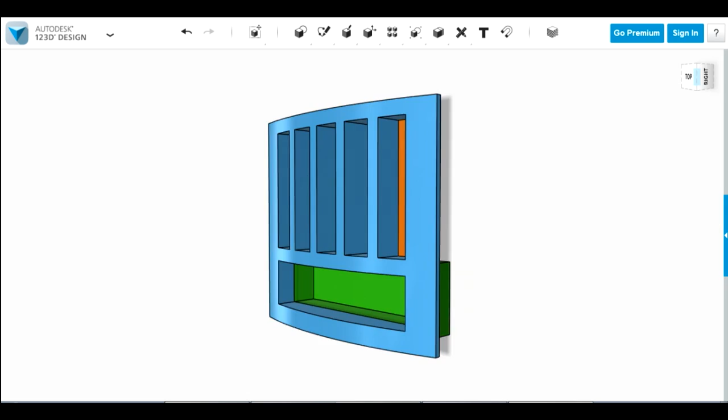They've got kind of a bottom vent which is much deeper, and some short ones, and typically on an R2-D2 they are chrome or silver, and the orange piece would be blue, and this green piece I'm doing as a separate piece so it can be stuck on afterwards, but basically that would be the same colour as the main body. So in fact this piece is printed flat on the ground, the orange piece is printed flat on the ground, and so is the green piece, and then those are all stuck together to make the vent.

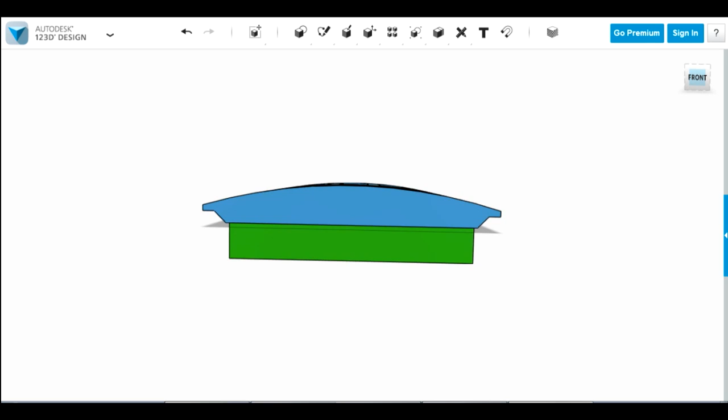Now I've made mine slightly wider than they should be, because obviously I've got no skins on my droid, but I still want it to cover up the part of the frame where that fits. And we can see there's sort of an overhang there on the blue part which will actually cover up the two frame verticals, and it shouldn't go that wide, and all of the slots should be thinner. But there we go, so it's slightly disproportionate, but it does fit perfectly into the droid.

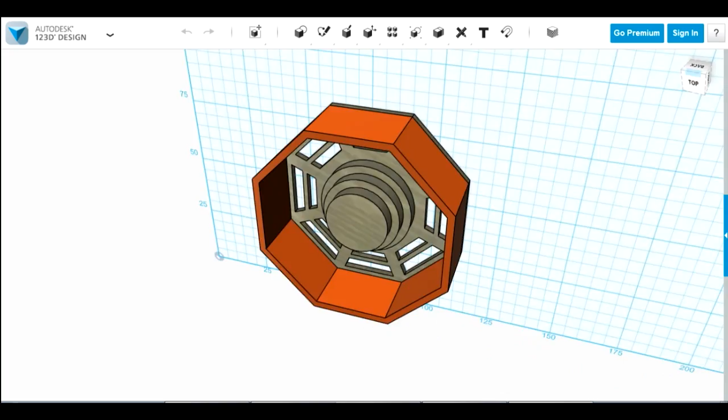The next part is the octagon ports, of which again there are two, and I've seen various varieties of these. Some people have a kind of blue interior on their R2s and the rest is silver. So sometimes they're all completely silver, but I've decided to do mine in two tone so that I can make my droid look a bit more interesting. And again, these are printed in two parts, one in orange and one in the silver ABS. So let's get those printed out and we'll see how well they fit.

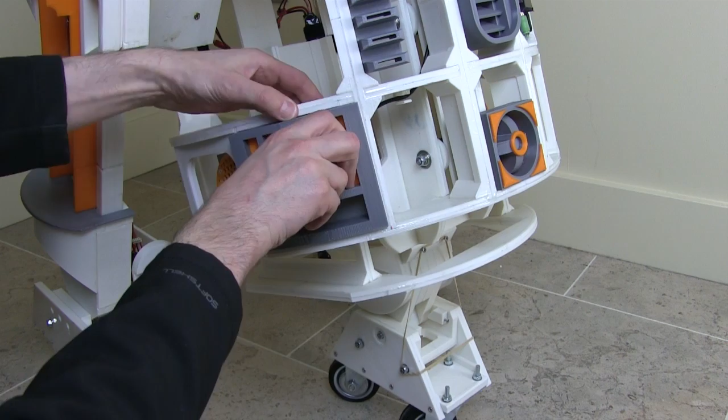So the pocket vent fits in here. Ah yes, that's a good fit. And the octagon port goes in there. So we're just going to solvent weld that in with a bit of acetone, and then the other two go around the back.

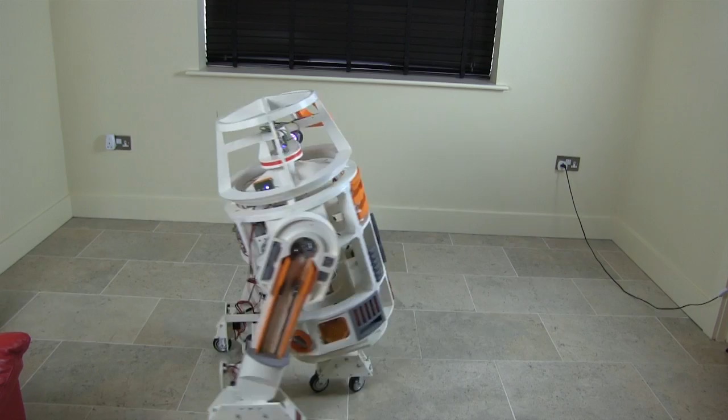Right, that's enough music. Let's talk about the animatronics. So to control the servos, which are these ones, I've already bought a bunch of Hobby King single chip digital servos, and I've already used those for the utility arms and the holo projector in the head, and I'll be using those for the rest of the features, mainly because they're white.

So the boards I'm going to be using to drive these, instead of driving these straight off the Arduino, which would need quite a lot of PWM pins, I'm going to use these Adafruit 16-channel PWM driver boards, which are I2C boards, and you can daisy chain as many as you like on the I2C bus, up to about 62. And you'll notice they have these little solder link things, which is basically 6-bit binary, so you can have a binary number there, bridged with solder, counting up, and you can put 62 of these in a row, all on the same two I2C pins, and run 16 servos from each one.

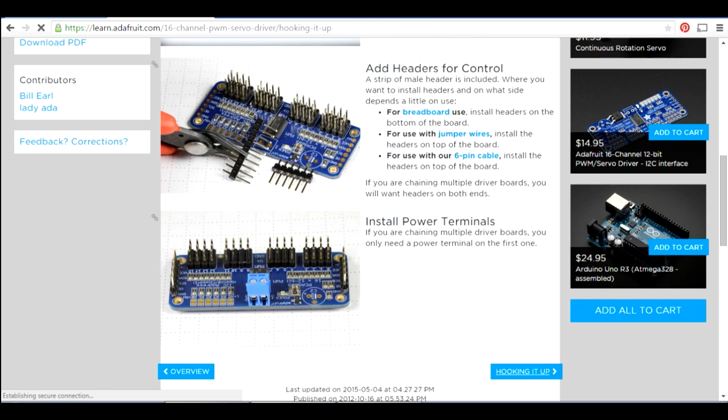There's a terminal block on the front there which is power for the actual servos, which you shouldn't take off the 5V Arduino because the servos can draw quite a lot of current depending on what you're doing. So there's a hookup diagram here for various Arduinos. It is just power and two I2C pins.

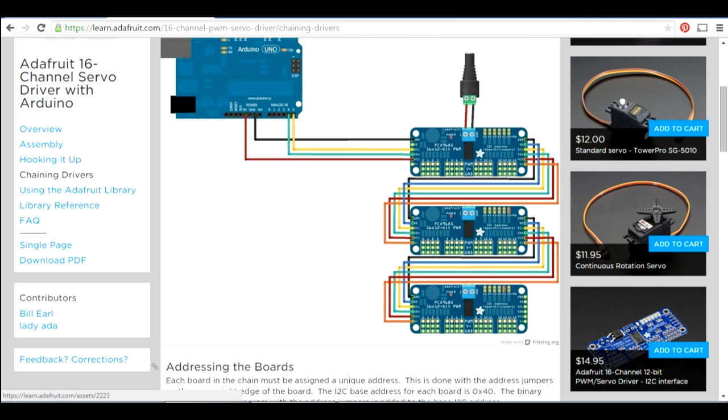But those vary depending on your Arduino board, and of course you can chain these together, up to 62 together, and you can go in and out on the pins at each end, or you don't have to, you can just go and cable I2C to each one.

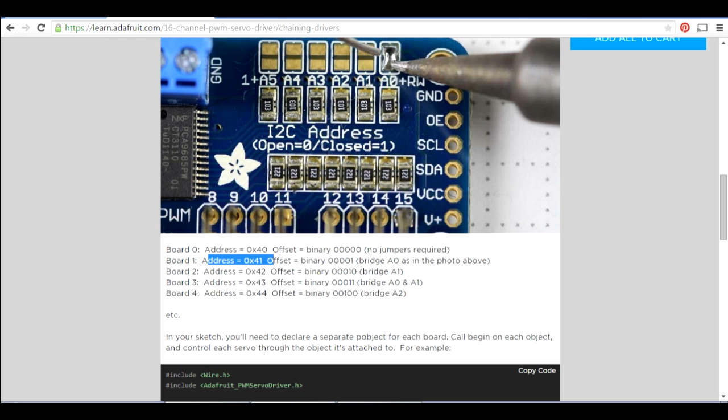Again, there it mentions how to address the boards, which I already mentioned, and that basically gives you a different base address, so you specify that in code to say which board it is, and then you just set up a new PWM instance and then you can address those individually.

There is a library and some example code which drives a bunch of servos, which is fairly easy to use as with most Adafruit products, and basically it tells you here helpfully how to use the map command to convert the pulse length into degrees so you can get that servo to go to a precise position.

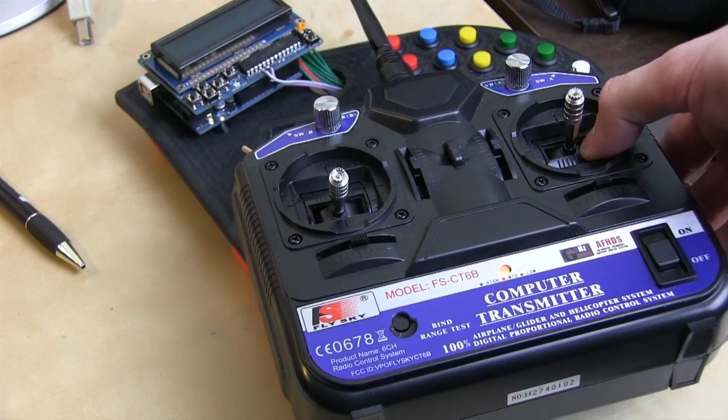So if you remember, my remote has got quite a lot of functionality. It's got this menu system for actions and sounds, which do various things on the menu, and also a bunch of buttons I can press, as well as the normal controls for driving and spinning the head.

So the normal way to code stuff in Arduino, or at least to say have the NeoPixels flashing in the logics, have various other things happening, is to have some stuff happening. Then typically people do a delay of some amount of time, and then have some other stuff happening, and then have another delay with some other amount of time, and some other stuff happening, and then maybe some if statements. If a switch is pressed, do one thing, else do something else, and then we'd have a loop that takes us back to the beginning.

The only challenge with this approach, when we've got so many things going on, so we've got all of the animatronics, we've got the sounds we need to play, we've got the logics flashing, which are NeoPixels, which are constantly counting up in a loop. The only issue we've got here is that these delays will actually completely stop processing, so the loop stops during that time. So that's not particularly great when we're trying to multitask so many things. So what we need to do is create something called a state machine.

So using delays would mean if I wanted to open one of the utility arms and then close it a short time later, all the time it's delaying counting, I can't do anything else like play a sound or open another utility arm. So instead we're going to use a completely different approach using timers.

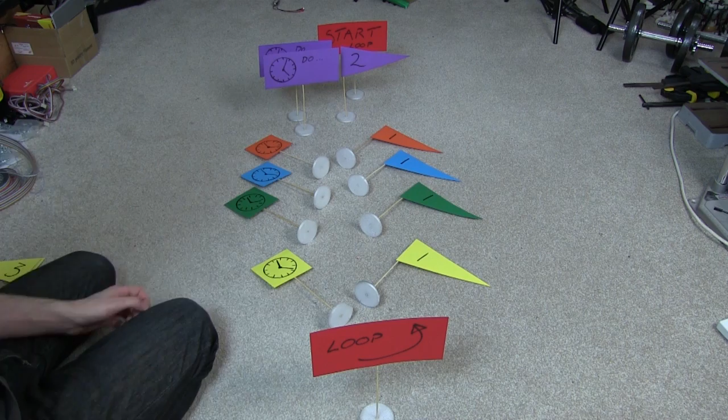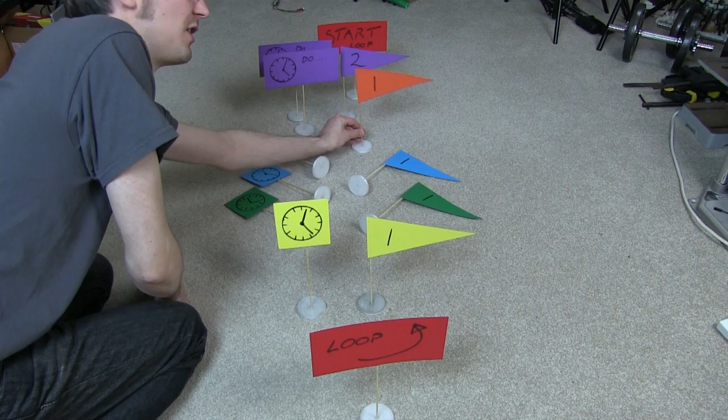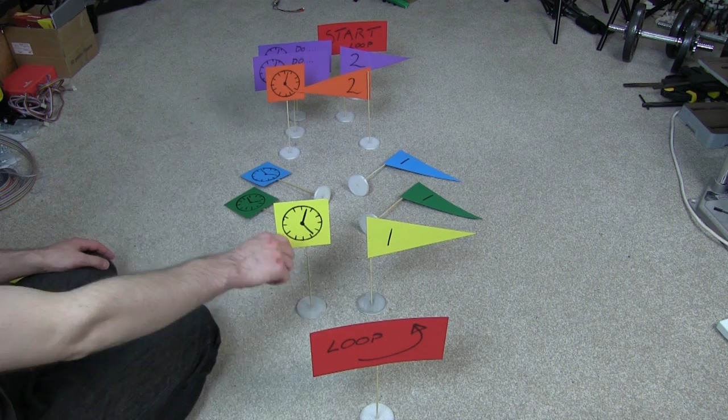Obviously the utility arm is only open and closed, so I don't really need 3 states, but I've done that for a specific reason. The reason is that I've introduced another timer with another set of states, which is the cascade timer. And this one is yellow, so when that is triggered by a button on the remote, it sets its flag to 1, but it also sets the first feature flag to 1, and when the loop comes around, it gets set to 2 and the timer starts. A bit later on, once this timer has expired, it then sets its flag to 2, and as well as doing so, it sets this flag to 1, which on the next loop round gets set to 2 and the timer starts.

And when this timer expires again, it sets its state to 3, and it also sets this flag to 1, which then on the next loop round, when the if statement says if the flag's 1, open the feature, opens the feature, sets the flag to 2, starts the timer, and at some point one of these timers is expired, so that gets set to 0, probably followed by this one and by this one. And when all of the states have expired, and it can keep going up to as many as you like to cascade as many of these features, each with a time delay in between, then this one resets to 0 and everything starts again.

And remember, the loop is always going round and round, so my NeoPixels keep flashing or my other features keep working, as well as my other trigger for sounds and anything else that I'm doing. So basically I can set these flags to 1 at any time anywhere in the code in the loop, based on any combination of cascade or anything I want to activate, and I know that all of the timing related to that feature will be taken care of and that the feature will open and close a short time later.

So I could have multiple cascade timers, some which maybe open all of the flaps all over the thing, some which only open flaps in the head, some which only open the utility arms, and some which trigger others and in turn cascade the other features. All I really have to do is set a variable to 1 somewhere in the loop when it's triggered by something, which could be a switch, another loop, another cascade timer, or something else built into the autonomous stuff which I'm planning for later. So here that is working. I've got everything that's going to be on the Droid apart from the soundboards attached.

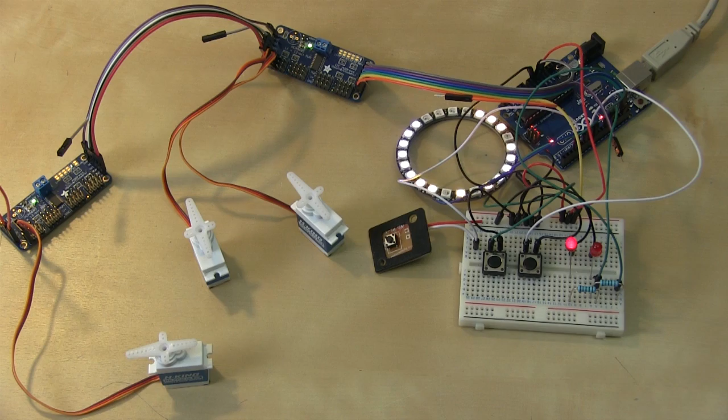So to demonstrate the code is multitasking, these 2 LEDs flash backwards and forwards all the time. My NeoPixels count round. These are flashing at something like 300 milliseconds each time, switching over. The NeoPixels are shooting round there at 100 milliseconds. So I've also got my 3 servos attached across the 2 boards. So they're addressed on each board.

Now there is one weird thing I found with these servos. These are quite cheap servos. They cost about £2.50 each in money. They're single chip digital servos, and I found a strange thing, which is that I can't drive them to a new position with one command.

So if I change the PWM value on the servo board in one go, they'll basically ignore it if it's too much. So if it's right at the end range of their motion, so I'm trying to turn them 180 degrees. If I turn them a smaller amount it works okay, and if I swap them for a normal analog cheap radio controlled car servo, that works fine as well. So the way I've got around this is by driving a value to these with a for loop which counts through every intermediate value.

And this takes quite some time, and unfortunately it does hang the loop for a short amount of time. Now I could have made that increment be on a timer throughout the whole loop as well, but I haven't done for now. And in fact the Adafruit example code for these PWM drivers for driving servos already had this for loop in, which is the only way I would have found out how to make these servos work. So if you've got any other servos, then you can do true multitasking, but I've got a slight delay when these servos trigger.

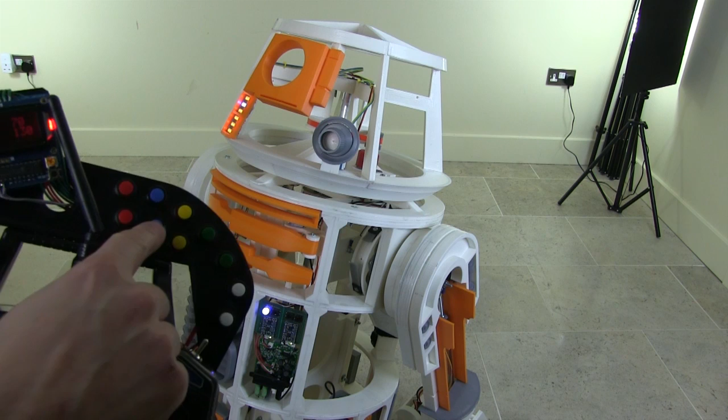And the bottom button activates the holoprojector. And the holoprojector's got 4 states, so it turns on the light, waits for a bit, moves the holoprojector, waits for a bit, moves it back, waits for a bit, and turns the light off. So that's a 4-state machine. And obviously I can activate the other features during that because it's multitasking, and I can still play the sounds. And I can still play multiple sounds and activate those features as well.

And since there's a separate Arduino dealing with the driving and the head turning, all of those things still work as well, although I don't have enough hands. But ultimately I can drive this thing around and activate the features. So there we go. So looking pretty good. We've got a lot more features to add in. So we've got some more flaps on the head to put in, some other bits and pieces, as well as utility arms and lots of things which are all going to be built in the same way.